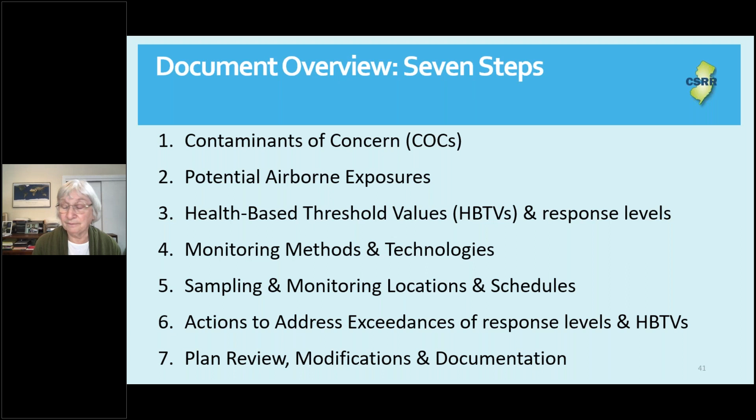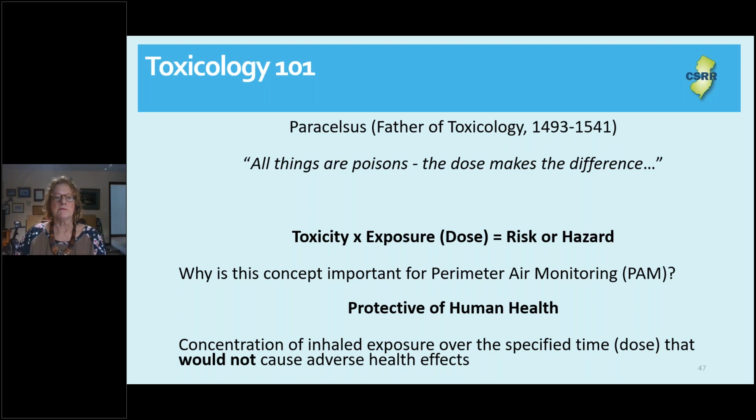And as Joanne mentioned, the first step is sufficient data. At this point in time, you've already taken a lot of samples out there, and you know what's there, and you've characterized not only the delineation part, but is it hazardous, non-hazardous, and what chemicals are exceeding that you need to be cleaning up. Oftentimes as toxicologists, we're very worried about ingestion and dermal exposure. But here, we're going to really focus on those off-site inhalation exposures. Because again, if you can manage those and maintain them under certain levels that are known to cause toxicity, you can reduce the risk.

The target, obviously, as has been mentioned earlier, are volatile organic chemicals, or VOCs, along with semi-volatile organic chemicals, SVOCs. The inhalable particulate matter that Alan spoke of is particulate matter that's equal to or less than 10 microns. And that is the type of particulate matter that you can actually inhale and get down into your lungs and produce adverse effects. The other thing to be aware of is, you might have compounds that exist in different phases, like mercury vapor or metal fumes.

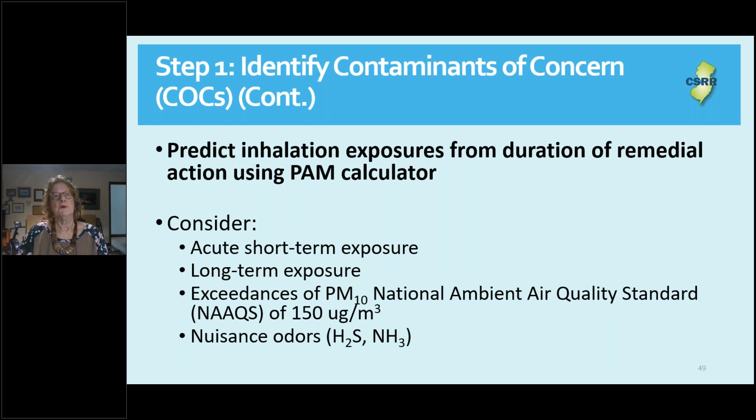And then, as I mentioned in the previous slide, there are nuisance odors. A good example, as Alan was mentioning, is manufactured gas plants. There is a distinct odor of mothballs, if you've smelled that, which is basically an indicator of manufactured gas residue. People can smell it at orders of magnitude differences. Somebody might not be bothered by it at all, and others are extremely sensitive. That may be due to some pre-existing condition, like asthma. So nuisance odors can be a problem, and we really need to not forget about them.

May I have the next slide, please?

Let's move then to a critical component of the perimeter air monitoring plan, and this is the conceptual site model. I think a lot of people are familiar with conceptual site models. They might think of it as a groundwater model, very complex mathematically in how the compounds move. But here we're really talking about the potential for airborne emissions and subsequent exposure. So how are they going to impact those receptors? Remember, if you have a community nearby, there could be sensitive receptors in there, like a nursery or daycare where there are children, the elderly, and of course hospitals. So it's very important to understand your receptors and their locations.

Again, you've got to know the characteristics of that source material. You don't want any surprises. The whole thing about PAM is to make sure as you're planning that you don't get any surprises, or you're prepared for those surprises. We all know they happen, but this will be helpful for you to make sure you can deal with them. Understand the transport: how are they going to get to those people? Are they going to be bound to the soil particulates and be part of that PM10 I mentioned? Or are they going to volatilize in the air? Two different ways, and you've got to address them both. And uniquely to the PAM, you're really looking at inhalation, not dermal absorption or ingestion.

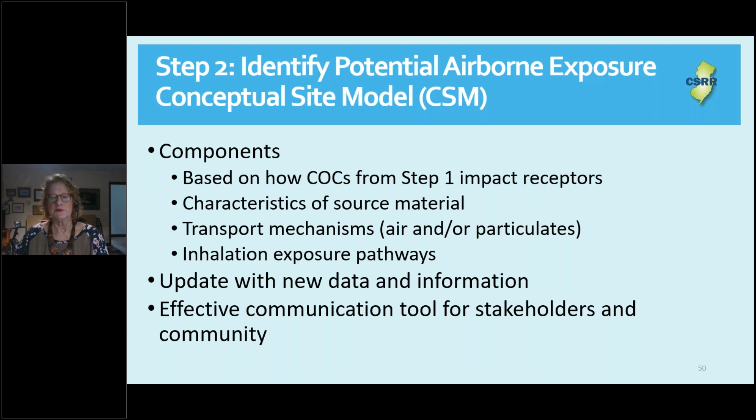As for anything, you've got to keep it updated. Don't take your CSM, stick it in the drawer, forget about it and go off on your merry way and execute your remedial action work plan, because new information could come along that will be important. So it's a document that keeps living and changing. If you do that, it can be a very effective communication tool for stakeholders. Show them this plan so they know what's going to be happening. Taking the uncertainty and unknowns out of things helps the public understand and be more accepting of what's being done, if you communicate that you're actually there to be protective of human health. May I have the next slide, please?

I mentioned the conceptual site model, and just to show you, this is a very primitive one, but it shows that there's a lot of things that can be going on. But what we're really looking for is the vapor and dust emission, which is centralized in this box on this slide. And this is where you're going to have your exposure point, where your receptors may interact with them as it's transported in the air to the receptors.

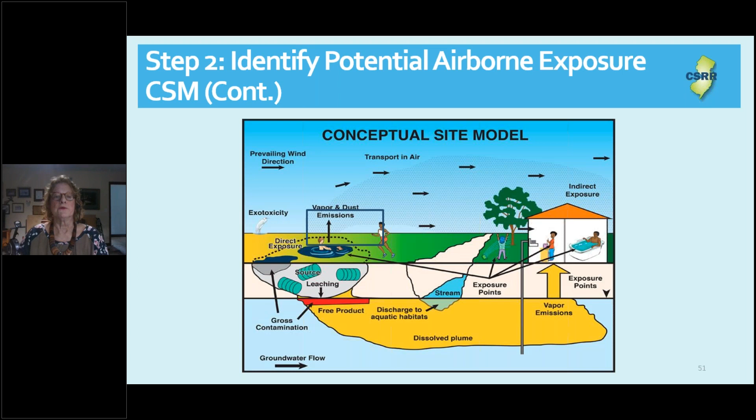The CSM answers really important questions that you should be asking, but I can tell you the community will be asking as well. What are the source materials and emission generating activities? So when the material's in the ground, let's say, it's not necessarily a problem for those individuals living nearby. But once you take that material and start doing something to it, which is important because we've got importance of remedial actions in environmental situations. But what is important is what are activities that could be generating.

Joanne mentioned, if you're creating an environment for emissions, you might be doing that by mixing. For example, mixing a fixative stabilization into your soils. And all those things, even though you're going to end up fixing the original problem, you could generate emissions, and it's important to know what those are. Again, it's not just particulates, it's particulates and volatiles. And some chemicals can do both.

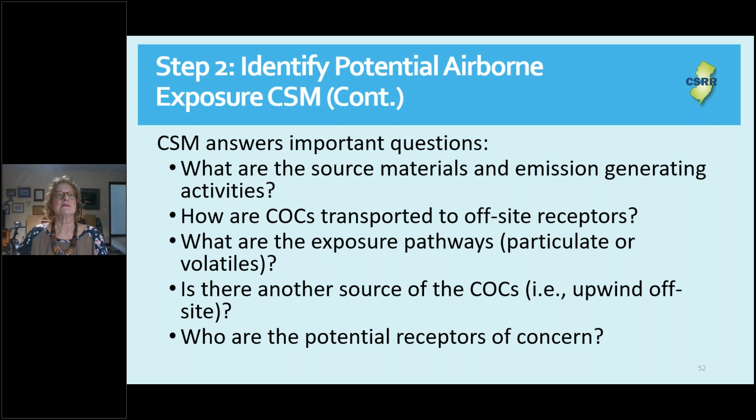I mentioned naphthalene. It's one of my favorite chemicals to talk about, and how important it is to have background and understand your background conditions. New Jersey air toxic benchmarks for naphthalene is 0.03 micrograms per cubic meter, pretty low. But you can see in this red box that a lot of areas exceed that, particularly in the northeast section of the state. So it's important to know that and be able to accommodate and understand that, so you will know what you might be contributing versus what the ambient background might be.

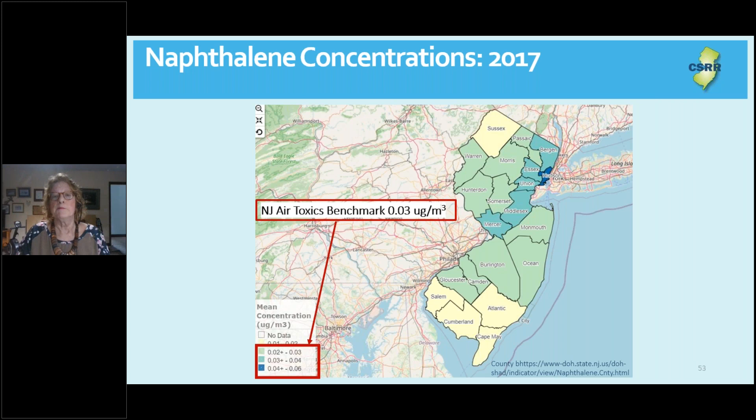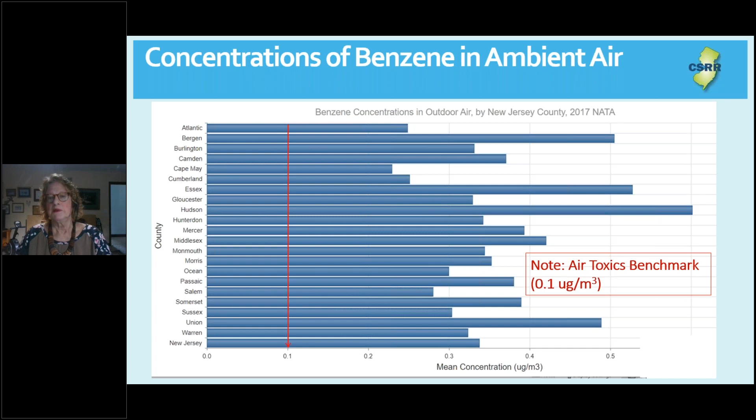Taking your background concentration before you start your remediation for at least 3 days, so you understand what those conditions are and are able to deal with them if there's going to be a problem with something like benzene, if that's one of your COCs at your site, or in fact, something like naphthalene or PAH. It's very important. Could I have the next slide, please?

You've heard these terms both from Joanne as well as Alan. And so we're now moving to step 3. We understand what we've got, where it is, but now we need to say, what are our health-based threshold values, or HBTVs? Those HBTVs are based on New Jersey's hierarchy of toxicity factors. They're the same toxicity factors that were used to create the remediation standards. So those are also presented in the appendix of the PAM.

And so there is an important piece there, to understand that New Jersey establishes those criteria on 1 × 10⁻⁶ risk for carcinogens for any one chemical, or if it's not a carcinogen, a hazard quotient of 1 for non-carcinogens.

However, the important thing to remember, as Alan had mentioned as well, is that the project is targeting less than 1 year. So if your project is less than 1 year, you're going to be looking at the hazard quotient, or HQ. And if it has a non-carcinogenic value, that's what the HBTV will be based on.

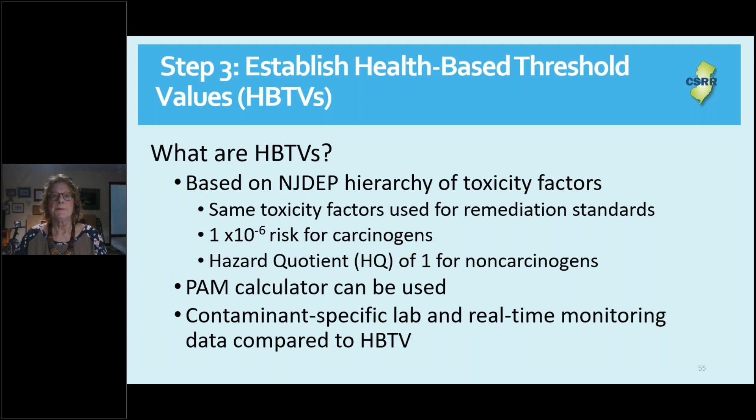I don't know about you, but my head kind of spins when I start seeing a lot of acronyms and new terms. And don't be frightened. We're going to get through what the difference is between the HBTV and the response level. I put this chart together, first of all for me, to make sure I can understand and communicate the difference between the HBTV and response levels and the importance of those.

As we mentioned, HBTVs are chemical specific. It's the benzene air concentration developed based specifically on your project duration, 8 hours a day, 10 hours a day, and equal to or less than 1 year. And again, the toxicity is at 10 to the minus 6 risk if it only has a cancer risk factor, or a non-cancer hazard quotient of 1. So they're very chemical specific, and this is what you need to make sure you're not exceeding to protect public health. But what's the response level and what are the differences?

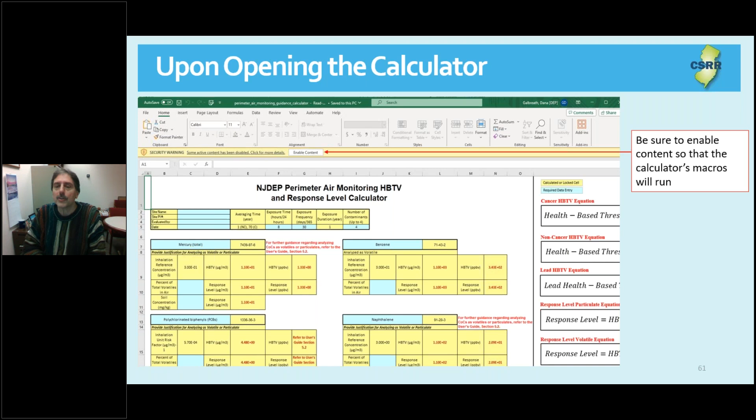So when you go to the guidance documents website for the CSRR and click on perimeter air, you will get a tab to click on to bring up the calculator. When you do, you will likely see this security warning, because there are a lot of macros that run in the background, and so your computer will probably perceive this as a potential threat. However, we're from the government. You can trust us. Please enable the content in order to allow those macros to run. Next slide, please.

Once you open up the calculator and enable the macros, you should see this page. Now, depending on how far you zoom in or zoom out, you may or may not see this entire interface. However, I wanted to show you what the interface looks like, and then we will be going through each component. So on this interface, the majority of the space, the upper left-hand corner, which takes up about 3/4 of the interface, is the calculator itself. And you'll see there are yellow and blue boxes. We'll talk about those in a bit. Directly underneath those are a series of radio buttons. We will talk about each of those in turn and what they do.

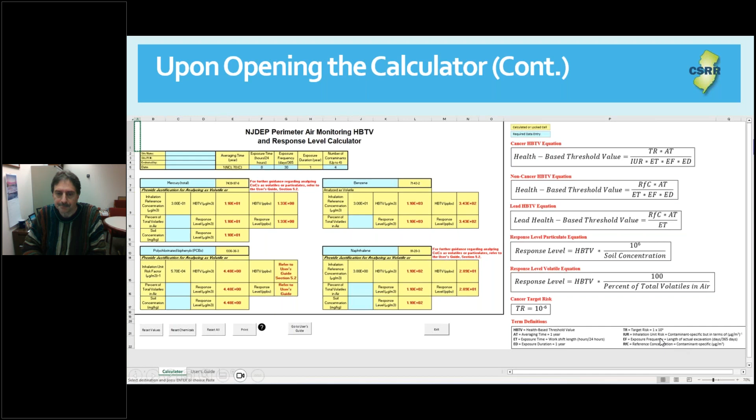To the right, you will see the equations that Deb had talked about. And these are the equations that go into calculating both the HBTV and the response level. And finally, on the bottom right-hand corner, are a list of the acronyms that we use and what they mean. Next slide, please.

So starting with the calculator itself, you can input site-specific information. So you'll notice that there are blue boxes and yellow boxes. The blue boxes are boxes that you can put information into. The yellow boxes are locked. They are either default values or calculations. So looking at the upper left-hand text box, the first set of blue boxes that you'll fill in is just site-specific information, such as the site name, PI, who did the evaluation, and the date.

Moving to the next text box, you see where the green arrows are going there. You will fill in your exposure time and exposure frequency. This will be the number of hours per day you're anticipating doing the work and the number of days that this work is anticipated to take. Again, these values we have predetermined to be between the values of 8 and 12 hours per day, because that's a typical work day. If you need to go outside of those hours, please contact us and we can adjust the calculator. Also, the frequency between 20 and 225 days. As Joanne had mentioned, below 20 working days, this document is not applicable to your site.

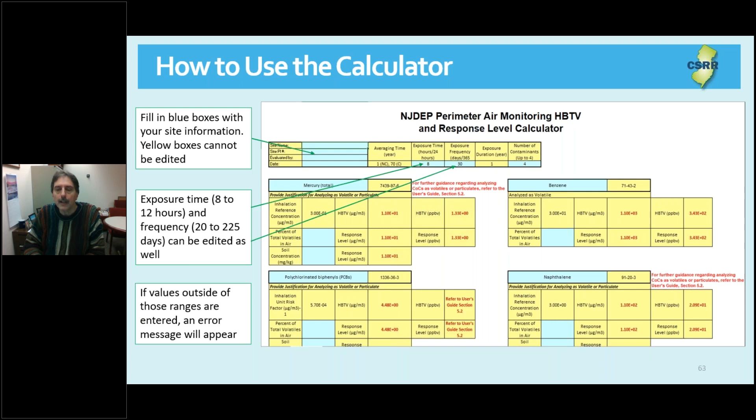All right, in that row, the final blue box is the number of contaminants per page that you would like to evaluate. You can evaluate between 1 and 4 contaminants per page. And this is something that we did receive comment on when we issued this calculator in draft. And we had considered increasing the number. However, the lift to do that and the time frame we had to do it, it really wasn't feasible. So it is a comment we will keep for the next iteration of the calculator to look at.

However, with the radio buttons down at the bottom that I will go through later, it is fairly easy to produce multiple sheets without having to re-enter all of your information. So you will select the number of contaminants as a drop-down menu, and you can select 1 to 4. Next slide, please.

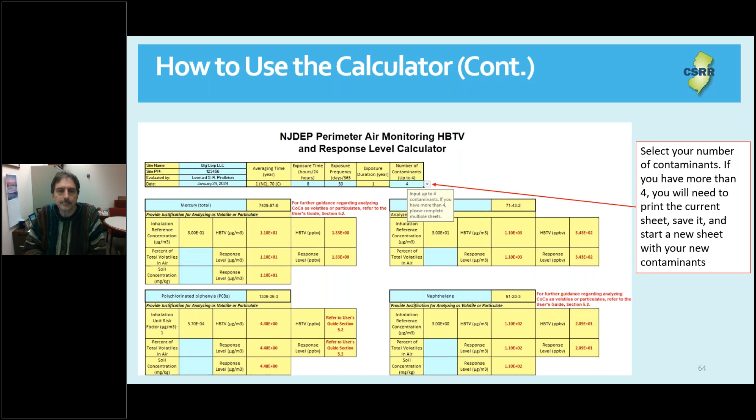So looking at the radio buttons on the bottom, the first one is reset values, and you can see the red arrow pointing to the blue fields. This is for entering your percent of volatiles in air or your soil concentration for a specific contaminant. I will talk about that more later. But you can enter values in there, and if you decide to change those values, you can simply hit the reset values button and it will reset everything for you.

The next button is reset chemicals, and as the red arrow indicates, that is the chemical list. If you hit reset chemicals, it will take all of the chemicals you have listed there and change them all to acenaphthene, which is alphabetically the first chemical on our list. And then finally, there's a reset all button, which is the third button there. And that will reset everything, including all your site-specific information. Next slide, please.

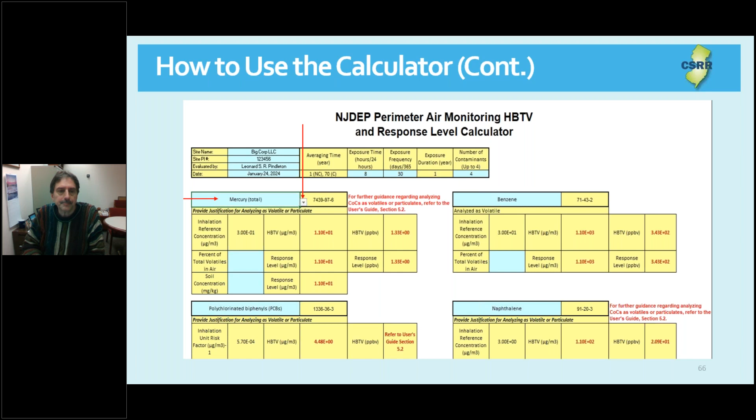This is where you will enter the contaminants of concern. So as the 2 red arrows indicate, there's a field where you'll select your contaminant of concern. When you click in there, you'll get a drop-down menu. And all of the contaminants that are listed in the remediation standards will be there in alphabetical order. So you can simply scroll down, find the chemical that you need, click on it. It will enter that chemical, and the calculator will automatically pull up all of the associated chemical properties and toxicity factors associated with that chemical. Next slide, please.

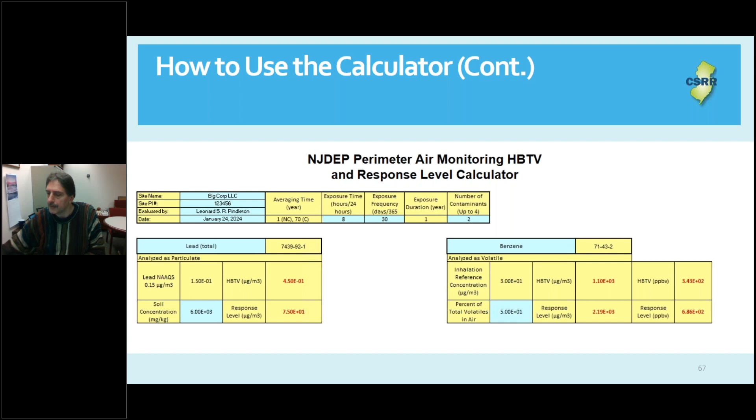All right, so if the calculated response level would be above the National Ambient Air Quality Standard, or NAAQS, that Deb has talked about, it will default to the NAAQS of 150 micrograms per cubic meter. And the reason for this is when we had gone through the SAB, they were very insistent that we do not add to or exceed the NAAQS, because that is a health-based value based strictly on particulates and not necessarily a contaminant, but the level at which a particulate will have adverse effects on people's respiration. So if your calculated value is above 150 micrograms per cubic meter, the calculator will automatically put the level at 150.

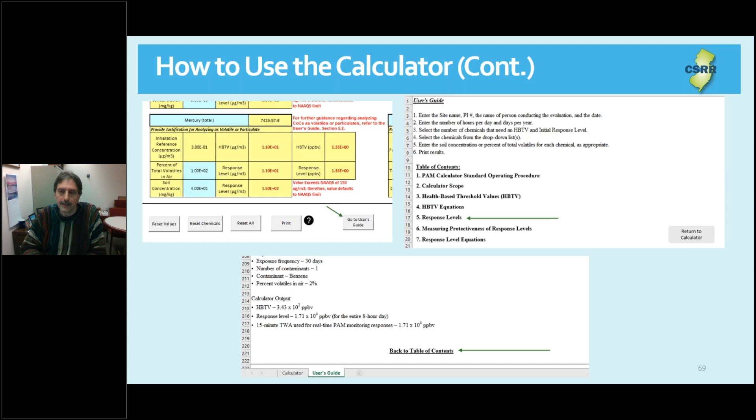Once you get to the user's guide, you will see a table of contents, and in this case, for mercury, it is asking you to go to section 5.2. So when you see the table of contents, response levels, it is section 5. You click on that, it'll take you to section 5. Scroll down to 5.2, look at the information. Once you're there, you can scroll down to the bottom of that section. As indicated on the bottom of the slide with the green arrow, there will be a tab that says back to table of contents. When you click on that, go back to the table of contents, and there's a button there to return to the calculator. Next slide, please.

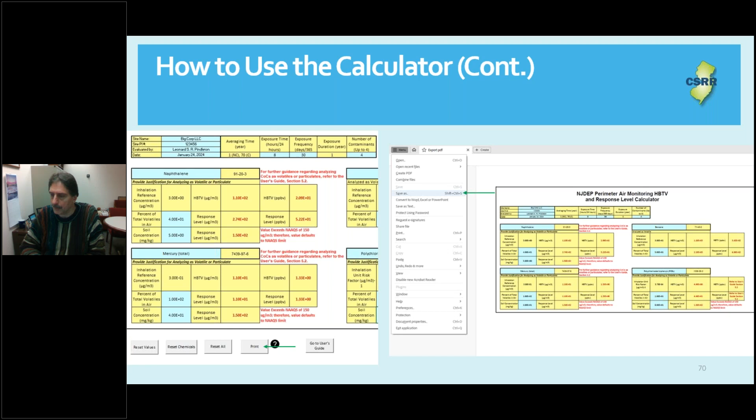So once you are finished entering all of your site-specific information, your chemicals, and the percent volatiles in air and soil concentration for those chemicals, you can print out your results. As indicated with the green arrow at the bottom of the slide, there's a print button. When you click on that, you will get a menu. Please go to the menu where the green arrow indicates Save As. In this instance, it will save it as a PDF. Please give it a unique name so as to not overwrite other sheets that you may have saved. Once you have done that, printed it out, you can then go back to printing out more sheets if you need to. Next slide, please.

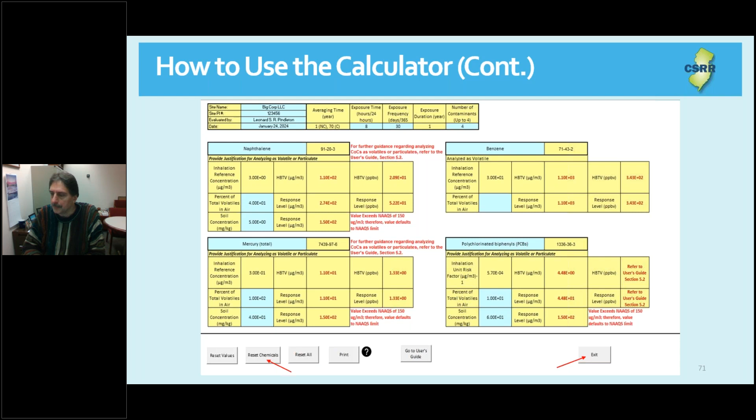So if you need to do more sheets, you can simply reset chemicals. It will save all of your site-specific information, the name, PI number, so on and so forth, but also your exposure time, frequency, and so forth. So then you can go about entering new chemicals and the appropriate concentrations for those. You would then repeat the process to print. Once you are completely finished, you can hit the exit button and it will take you out of the calculator. Okay, next slide, please.

Okay, finally, please note that some contaminants, such as acenaphthene, excuse me, stumbling over that, do not currently have appropriate tox values. So although they're included in the contaminant list, the calculator won't be able to produce HBTVs or response levels. So please contact the department if you run into that issue.

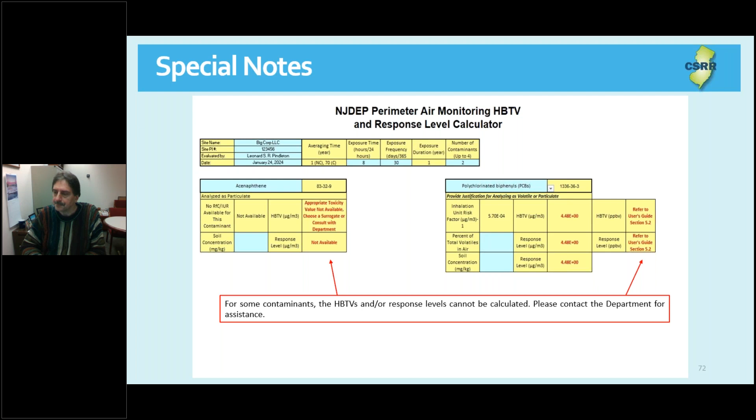Also, for PCBs, HBTVs and response levels cannot be calculated because PCBs are a series of congeners. Depending on which congeners you have on your site, they will have different molecular weights, and molecular weight is part of the calculation that goes into this whole process. So for PCBs, please contact the department. Based on the PCBs present at your specific site, we can come up with a reasonable molecular weight, enter that into the calculator, and produce a result for you. Next slide, please.

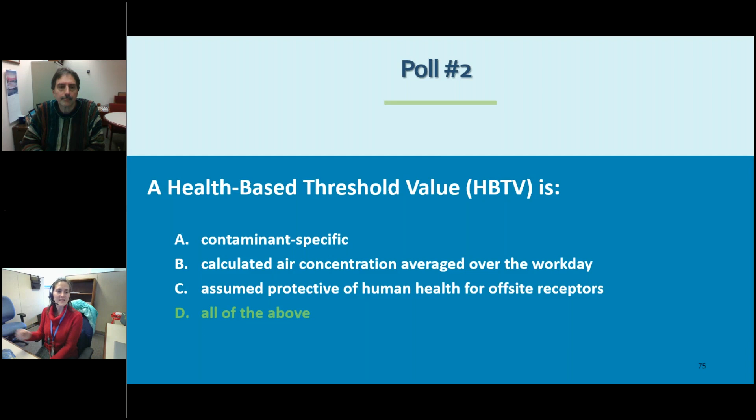We're going to test your knowledge, so I'll turn it over to Diane. Hi, everyone. We're on our second poll question. It's asking: a health-based threshold value, HBTV, is A, contaminant specific; B, calculated air concentration averaged over the workday; C, assumed protective of human health for offsite receptors; or D, all the above. I'll give you a minute to answer the question. And the answer is D, all the above. Okay, you go back to it.

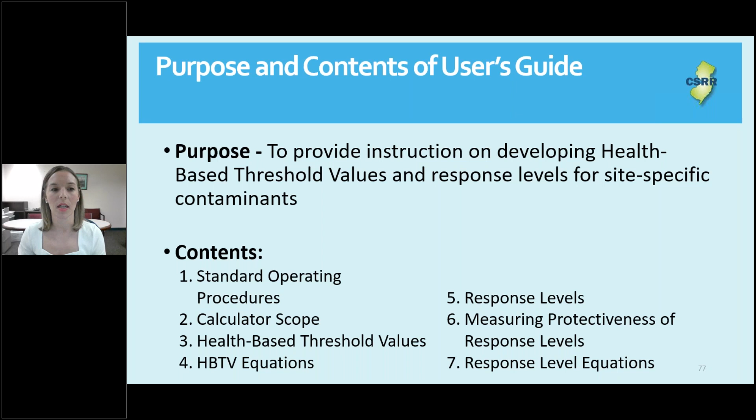The first section of our Calculator User's Guide is the Standard Operating Procedures section, which discusses calculator input values like exposure frequency, which would be how many days work is anticipated to occur in a calendar year, and workday duration. It also discusses how to produce the calculator output with the functions that exist on the calculator tab.

The second section of the User's Guide discusses the calculator outputs being the health-based threshold values and response levels that will be used with confirmatory sampling and real-time monitoring, and why these values are being established for remediation sites.

The third section of the User's Guide homes in on the health-based threshold values and some of the exposure assumptions that are used and embedded into the calculator itself, like reference concentrations for specific contaminants. It also directs investigators to consult with the department if an HBTV cannot be calculated for specific contaminants because inhalation toxicity information isn't available.

The fourth section of the user guide lists out two different equations used to develop HBTVs, one using reference concentrations and one using the inhalation unit risk concentrations, and provides definitions for the various input values. Next slide, please.

The fifth section of the user's guide focuses on response levels and their importance for use with real-time monitoring equipment. And it discusses how the response levels are based on health-based threshold values, but also account for site-specific soil data to adjust concentrations to be used with real-time monitoring equipment. It also discusses in detail how to determine the percent volatile of total volatiles at the site.

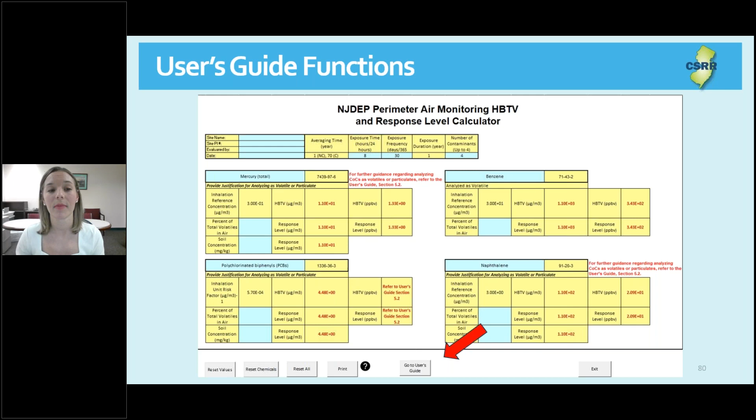The Go To User's Guide button will initially take you to the user's guide table of contents, which is a summary of what we just discussed. Immediately above the user's guide table of contents is a very abridged set of instructions of how to run the calculator if you just need a quick reminder on how to do so. But if you need additional information or instruction, each of these sections in the table of contents is clickable, and they will each take you to the section that you select. Or if you want, you can just scroll through the user's guide using your mouse.

Next to the user's guide table of contents is also the return to calculator button, which will bring you back to the calculation page that Alan was just discussing at length. Next slide, please.

And then lastly, there's a back to table of contents button in each section of the user's guide that will take you back to the clickable table of contents that we just talked about. And it also brings you back to that return to calculator button to go back to the calculation page. Next slide, please. And that is it.

So our first question, going back to the beginning, is the greater than 20 working days within a 30-day period sounds confusing. Can we explain that in more detail?

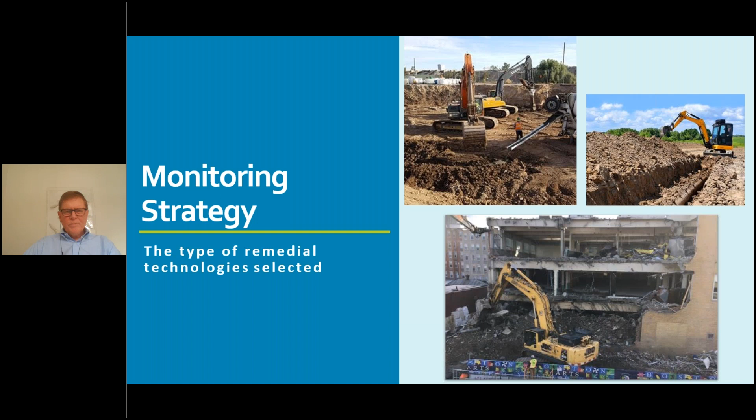You have the source-receptor relationship, and this is very important. There was a comment Joanne made about we're lucky to be living in New Jersey for a lot of reasons. But the one thing about New Jersey, it's the most densely populated state in the country. And being so, you're not going to be too far from various types of receptors.

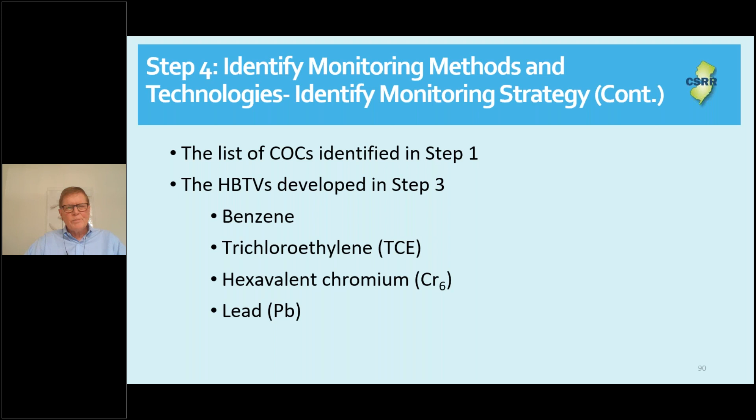And so part of your response level calculation that is being driven in the calculator is you're going to determine that if your total particulate levels are below a certain number, then your model can say, within 95% upper confidence limit, that your lead levels are going to be below or well below the HBTV. So you're not monitoring for lead, but you're monitoring for particulates that you assume are going to have lead in it. And that's your primary strategy to make sure that this potential exposure is going to be controlled.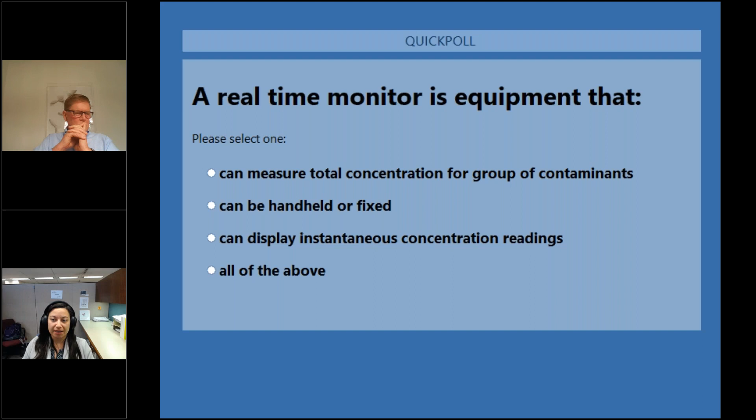All right, next slide, please. The answer is D, all of the above. Back to you, Bruce.

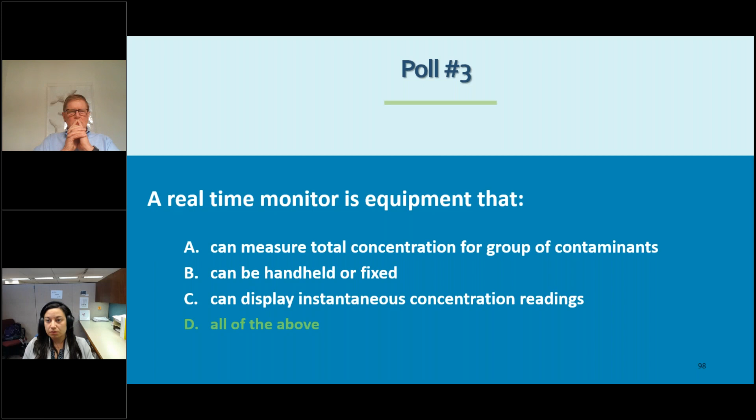So I'm halfway through my presentation, so it's a good time for everybody to kind of sit up straight, stretch a little bit, and as scintillating as the next one's going to be, it just gives us a little bit more blood flowing to our brain here. So let's continue.

I mentioned earlier that the SAB was very strong on analytical methods, and we've kind of flipped that a little bit. But we don't want to underemphasize the importance of confirmatory sampling. And so I think it's critical that as part of your PAM, all the assumptions you've made in establishing response levels with your real-time instruments, you have a good way of documenting that this is working as designed.

And so the first thing as part of your plan is to put together a methodology on how you're going to verify that these assumptions are correct, and what is your real-time monitoring program, and what kind of analytical measurements are you going to use. Okay, TO-15 for volatiles as an example, or whatever analytical method you have.

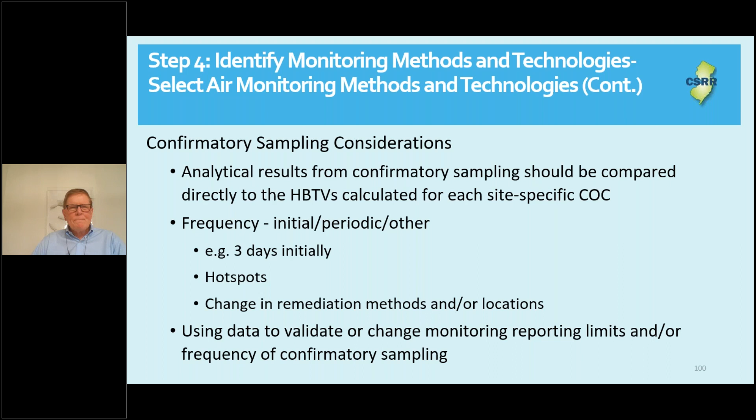The guidance document does specifically talk about these three areas.

I was kind of smiling at Deb Barsati when she said one of her favorite chemicals is naphthalene. I was thinking, what is my favorite chemical? Maybe everybody should have a couple favorite chemicals, but I totally get it.

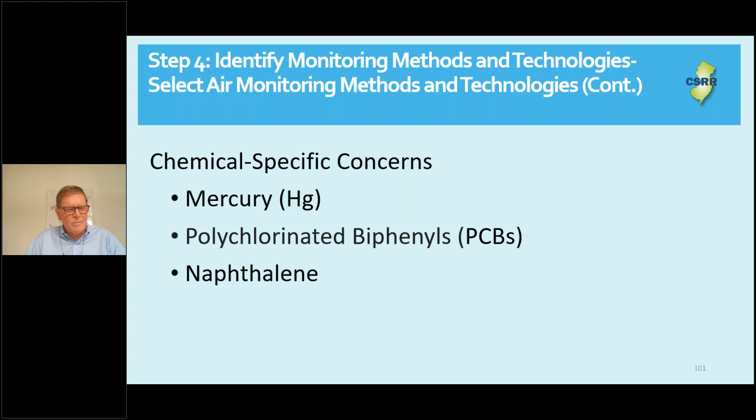What are our considerations? Some of it's practical: you want to make sure you can conduct air monitoring and sampling where it's going to occur. We'll talk about some of the practical aspects of that. How often?

Sample collection can also not just be confirmatory sample on a regular basis, but also can be if you have an exceedance. If you have a spike in your real-time monitoring, you may have a procedure where you're going to actually take some samples. How are you going to collect the data? You're collecting the data, hopefully not manually, but in some sort of database that actually can provide.

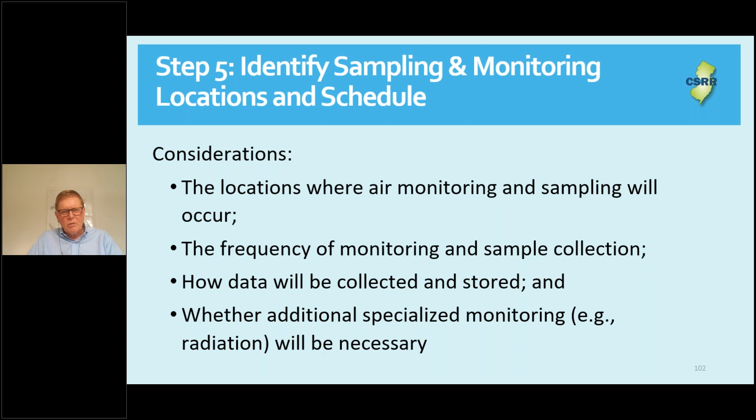This guidance document doesn't talk about noise, for example. Doesn't mention odor. But you may end up having other specialized monitoring that might not be part of the guidance document, but also be part of the needs and collecting things that are important for meeting the goals of the project. Next slide, please.

So more types of sampling and monitoring locations here. We have mentioned, I think, the fixed versus the air sampling monitoring locations, fixed versus monitoring. We mentioned that previously. You want to address what sort of collection at each location. So if you have 10 different air sampling stations, when do you actually collect samples at these various stations?

Sometimes you want to look at upwind, downwind type situations, and it's never always that easy because wind doesn't cooperate and necessarily go consistently in one direction. But you can do the best you can, and at least have a strategy on how often you're going to collect the air samples, and how often you're going to have monitoring in certain locations.

The air monitoring and sampling specifications. You start looking at the specifications, and I'll go in detail on that in a minute. Meteorological data, different procedures, and some background sampling. Okay, next slide, please.

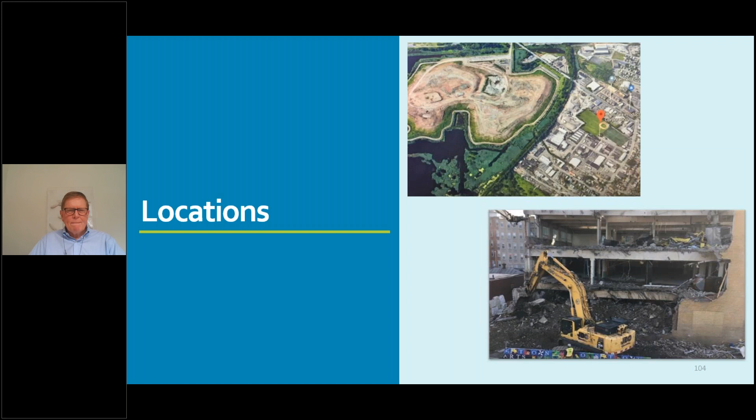We talked about fixed and mobile. I think I gave plenty of detail on the last slide of when you try to make decisions about making sure that you have a more fixed station that is really out of the way of any sort of activity that could hurt it or damage the equipment. Next slide, please.

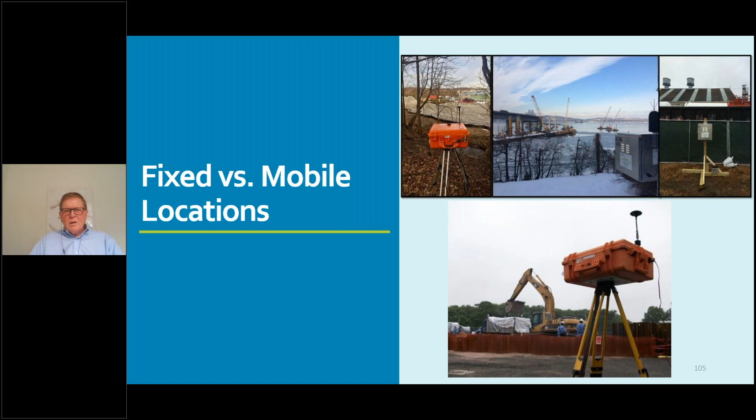Specifications. When you start looking at integrating data of multiple stations, this is where the technology has been out for quite a while, but in the case of these fixed stations and mobile stations, they tend to all be connected with wireless technology. Today it's mostly, if not all, cellular technology. In the old days it used to be line of sight, radio frequency technology that's behind us, thank goodness. But these can all be collected.